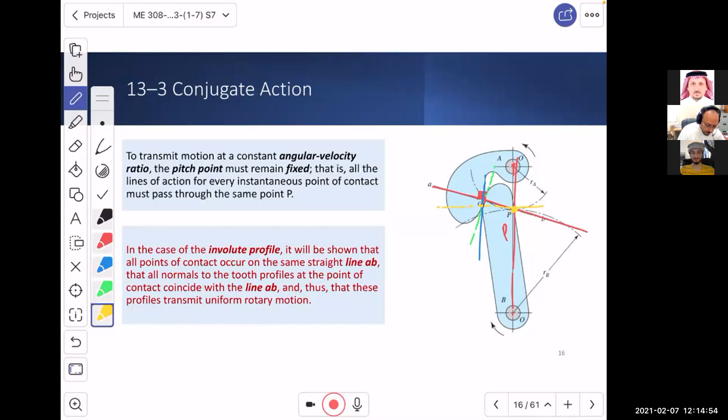Now what happens if this is not constant? Because the point of contact is changing. Remember, velocity equals omega r, which means omega equals V/r. So if that r, from which the rotation is measured, is changing with time, then you may have a fluctuating motion, something like 1000, then 980, then 1000, 980, 1000. How can you maintain the same flow, the same pressure, the same... how?

The process is all ruined. You need a smooth, constant motion. 1000, always 1000.

The involute profile is even more interesting. It's one of the ways to produce that constant motion, that constant angular velocity. But it is more, I'm gonna put it between two parentheses, more magical.

And I'm not joking, it is way more unbelievable. We do not promise only to let the point of this line, which is the perpendicular line of contact, pass through point P. No, we actually promise that as the motion is set, the contact point changes, but the line of action, this line, is gonna be always constant. Now remember, this line changes here because the tangent changes and the perpendicular changes. However, as they change, they all pass through point P.

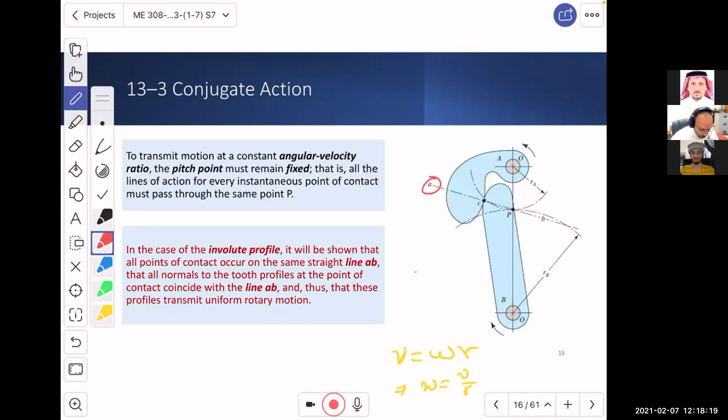Now what I want to show you over here is this. I want to show you that we can actually do this. It is not something like magic, but to show you this, let me tell you how it is done. Imagine that we put a flange, like here, a flange, which is B, like that, on top of this circle, cylinder, cylinder A. Don't think about how big it is, what is its radius, just leave it aside.

Now imagine that in this cylinder, we fixed the rope here, and then we wrapped it around it. And now imagine that you are pulling that rope from the top right here. Now, if somebody, or if you fix the rope over here, you can't pull it, right? It will always resist you, which means the rope will stay in tension.

Now, while you are pulling the rope, you can raise your hand up, you can lower it down. So for example, if you decide to push your hand down, the rope will wrap around, but it will go like that, right? If you decide to take the rope up, it will go like this. Regardless of how you change the altitude of your hand, the rope is indeed always tangent to the circle, always, will stay always tangent to it at the point before it's split from the curvature.

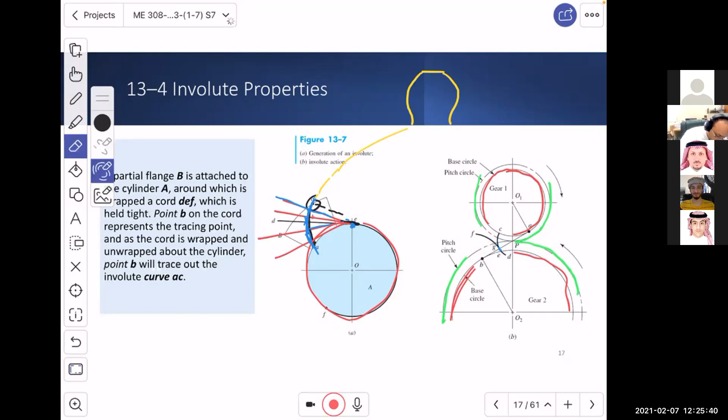Now what is important right here - these are some fundamentals you need to understand. First, this circle used to generate the involute will have a point A and another point B for the two mating gears. At this point of contact, this line is the pressure line.

That's the line which makes the pressure angle. That's number one. Number two, the pressure line will pass through point P. Do you remember point P? It was here in this example - these are not gears, but here it is the point which connects the two centers. That's condition number one.

Number two, that point passes through the location where the two gears are touching, which is at the pitch circle. And this line, by the way, is tangent to the radius of the involute circle. The involute circle - what do we call it? We call it the base circle. Base circle is the circle we use to generate the involute profile.

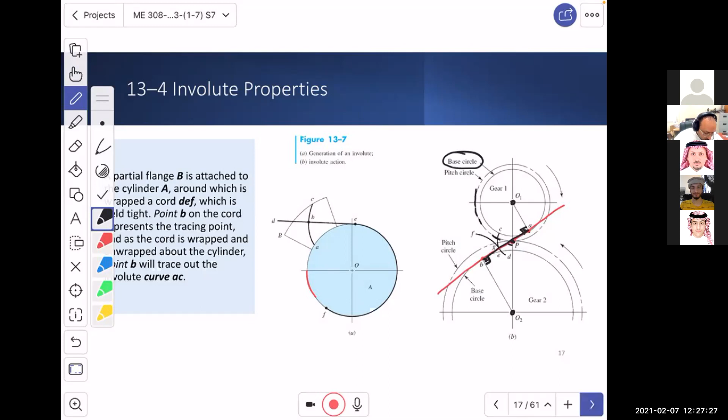Now if you look over here, we have a lot of dependencies. What I want to show you is that the circle we use to generate the profile is called the involute or the base circle. So what I'm going to do is show you something very interesting.

Let me share my computer screen for a second. Let me do this. Now what is this? This is an animation of an involute profile gear.

And what I want to tell you is the following: do you see this line? This is the radius of the base circle for this gear, perpendicular to it. And this line is the radius of the base circle for the other gear.

And we said that the action line - do you remember? This point is A, and this point is B. Look at it. This is point A, and this one is point B. These lines are the ones I just made over here.

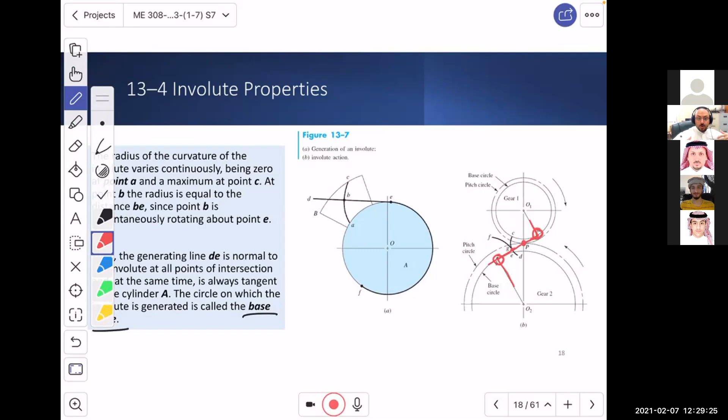Now what do we know? We know that this line touches over there at point P. This is the pitch point, right? Where the pitch circle comes in contact - the pitch circles of the two gears come in contact. And what do we say here? We said that if we follow an involute profile, then this is the promise we deliver. This is the involute profile.

The two gears came in contact. When they came in contact, that's the point P, okay? And the line of action over there, which is sometimes called the pressure line, because this, if you draw a horizontal line, is going to be phi, the pressure angle.

So what did we say? We said that this is the line where the forces are applied, this one and this one. So one gear is pushing this side, the other gear is pushing that side. Do you understand? Now I want you to focus very, very carefully.

We said that if you follow an involute profile, as the gear moves, the point of contact moves. Look, it gets further, but be careful, the gear is going down, because it is moving. So here, look at the level. This is the level, then the gear went down, then the gear went down further. Why? Because of the rotation. We're rotating. Now, the point...

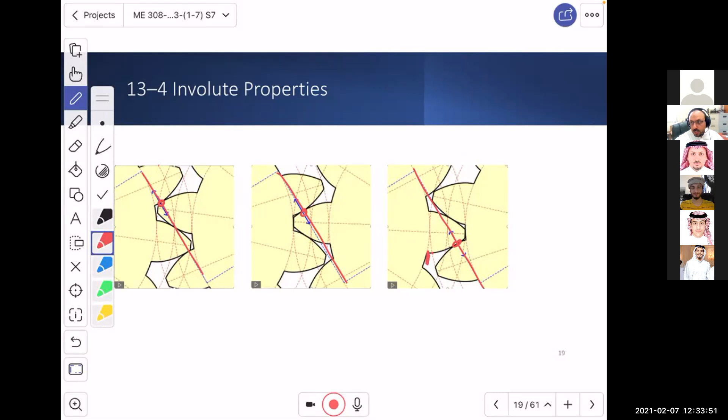So let me show you what I wanted to show you, okay, without further delay. So what you see right here is an animation. I need to switch it on, and I'm gonna let it go for several times. Now look, follow my mouse cursor. Over there, the gear, they got in touch, they move, the point of contact moves, but the line of action is always the blue one.

This is amazing, ya shabab. This is going to secure a smooth motion. That's why you don't feel it, you don't feel that tick, tick, tick, tick. It's not like a step motion, right? It's so smooth. And the forces are always acting in the same line, no matter what. That's what makes it uniform, that's what makes it constant in ratio. Otherwise, you may have a wavy or shaky motion.

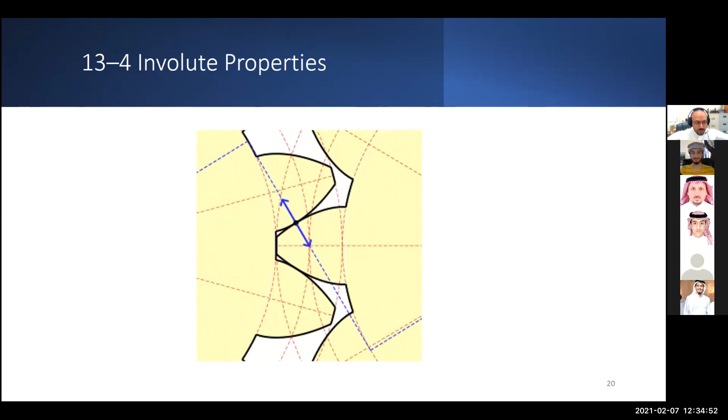Do you see that? Now, to answer the other question, let me show you this example. Now, look, this is the line of action. Now, all of a sudden, here, the green circle indicates that there is an engagement. Look at the point of contact, it is moving, but with respect to the gear, it is always acting along the line of action.

Now, while I was talking, look at this gear over there. There is another one, A, here, got engaged. Now, what does this mean?

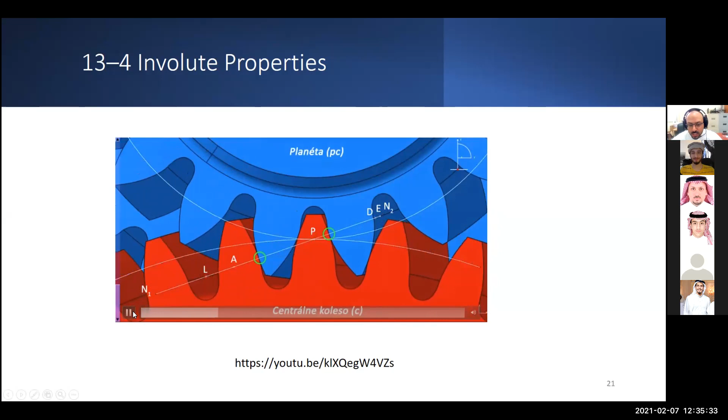It means that, look, this gear is gonna finish a journey up to here, right, while the other will finish a journey from here all the way to there. So this is like, if you imagine that the contact for one gear is 1, then this is 1 point something, because this has only a little bit left of it, while the other has a full contact to go. Did you understand? So I'm gonna turn it on.

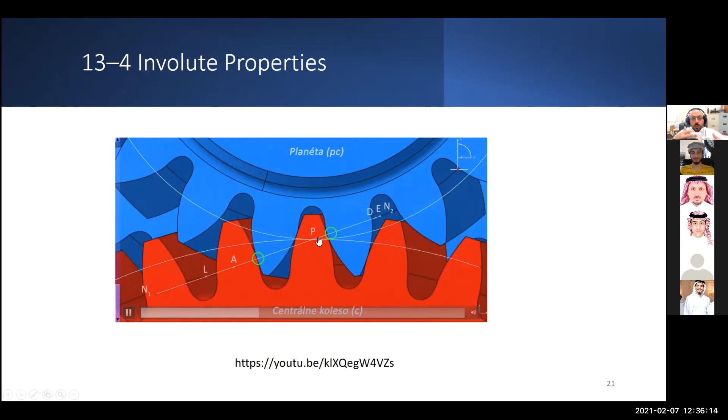So look, this is now about to finish, and another one will come. Look, there, another one comes, and this one. So it is continuous, right? Always there. The fact that it is acting on the same line makes the reason why the velocity, angular velocity ratio is the same, which is fantastic. And you don't have this jerkiness or shaky motion because something is happening here one time, then another one happening there—no, always on the same line. This is really, really nice.

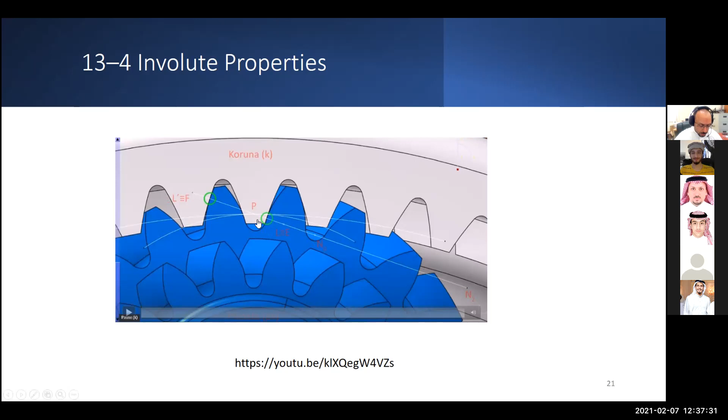So gears have a lot in them, ya shabab. It's not just cut teeth and that's it. I think now you understand how much mathematics and effort you put to generate this curvature, because this curvature and that curvature will change their radii, change their tangent at the contact in a way that will always preserve the perpendicular line of action to that tangent, pointing exactly at the same line. This is very beautiful. I love geometry a lot, and I think this is really, really nice, but it's all up to you—do you like it or not?

Let me share my screen now and go back to the slide.

Of course, ya shabab, these are fundamentals, which means later we will never talk about them again. Now you understood the involute, you understood why the motion is the same, and so on.

There are many examples on YouTube and the internet on how to generate an involute. But in general, for a gear, you can imagine that what we are going to do is split the gear into equal distances, equal arcs if you want to call them. Then we take a curvature, a line, and we extend it right there, just like what we did.

So you have the rope, and what do you do basically? If you extend the rope at a different tangent, let's say: you take the rope, and when you reach this point, you say I am not going to continue down, I am going to continue straight. Then you go to the next line and say, when I reach this point, I'm going to go straight. Then you have another one and say, when I reach this distance, I am going to go there. So for this one, this is the point. For this one, this is the point. For the green one, this is the point. And finally for the red one, you say, when I reach this point, I am going to go straight.

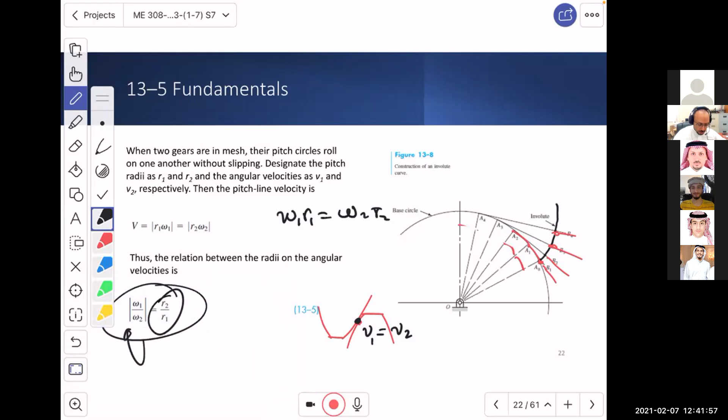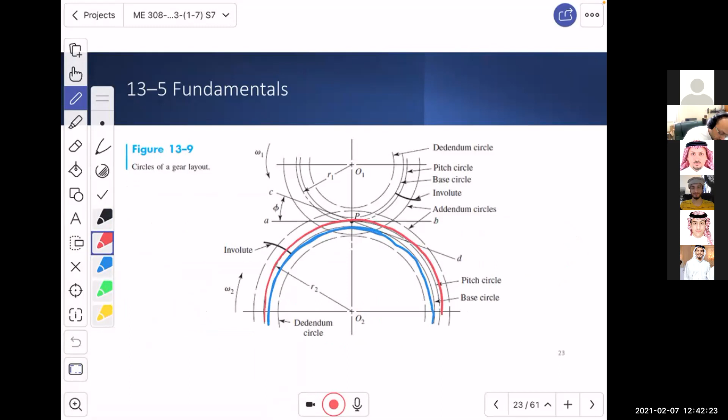So basically now what we know is that the base circle is down under—this is the circle called the base circle, and above it we have the pitch circle. So the question, and as I told you, this is the contact point here, the pitch point, and we have the pressure angles.

So the question is, let me just get rid of the second gear and keep one gear only. By constructing the point over there, this is point P, the pitch point. And I know that this is the line of tangent for the other gear. So the other gear is right there, but I'm not drawing it here.

By knowing that this is the pitch circle right there, the base circle is somewhere down. Do you remember point A and B on the base circles? So looking only at one circle down, which is for one gear, the base circle, let's say this is point A, and this is point B.

Now, we all know that the distance from P to the center is half the pitch diameter. We always represent a gear by a diameter, which is the pitch diameter. So it's actually D, the pitch diameter, and half of that is its radius, the pitch radius. So this is R, from here all the way to there.

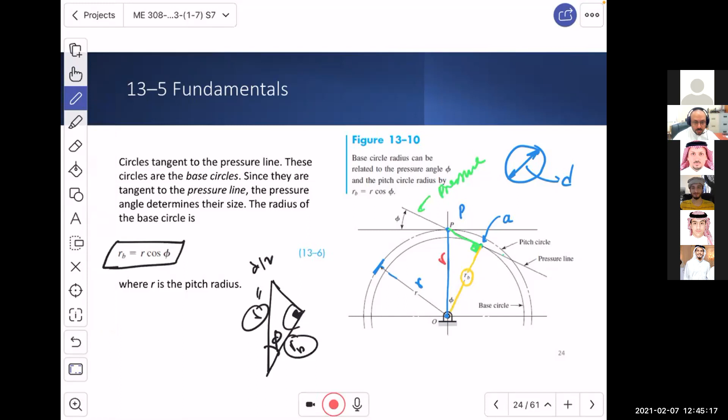So also, you may want to memorize these or write them down in your notebook. Along the line, we will have several standard relations. Among these relations is the distances for the addendum and dedendum. As a standard ratio, their distances are 1 over P for the addendum and 1.25 over P for the dedendum. These relations are good to take note of, because in the future, especially in design, if you have any case with unknowns, these values become very handy.

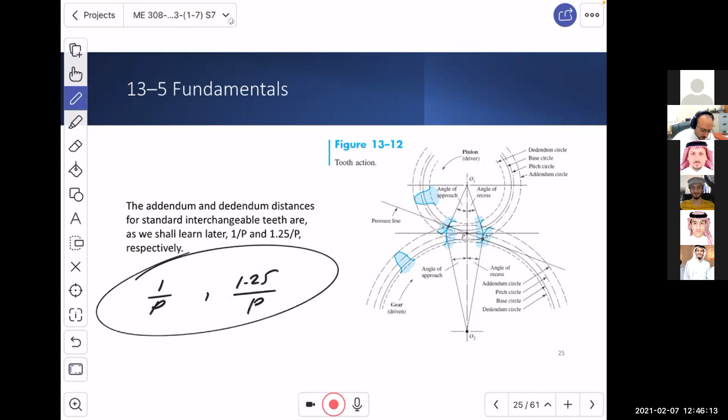Now, the last thing I want to talk about, then I will stop. We talked about two circular gears. Now we know in the industry that there are racks. Racks are like this—a straight kind of toothed part which is engaged with a circular gear.

In that case, we imagine that the rack is a gear with an infinite pitch diameter, infinitely large. And here, if you say this is the base pitch for the rack, it is related to the base, so the base pitch, PB, is equal to the circular pitch multiplied by cosine phi.

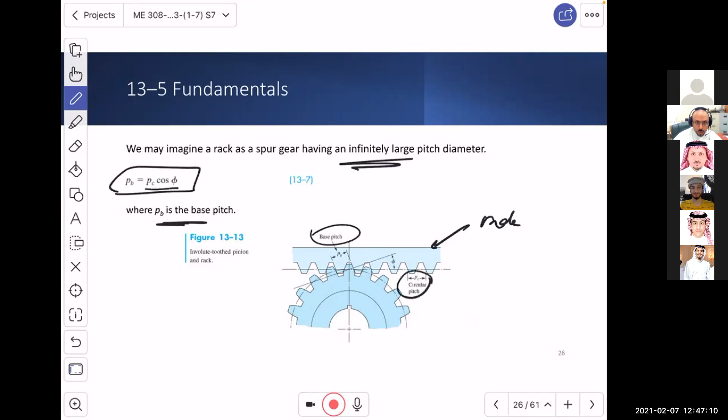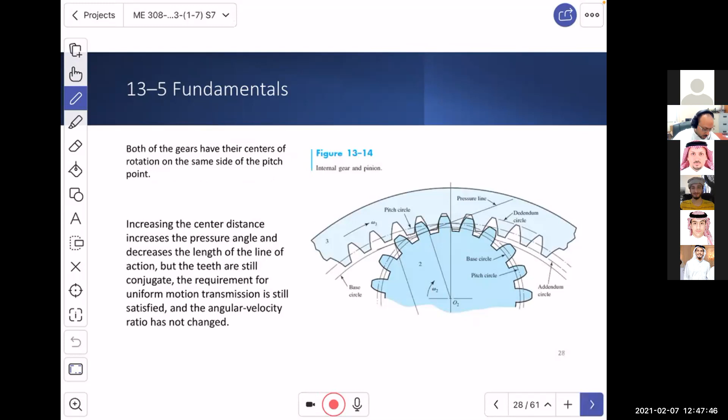And lastly, what happens if we have a big circular gear and inside it there is a small gear? This is also possible. What you should know is that all of these, especially this one, can still satisfy the involute profile, and the constant angular velocity can also still be secured. There is an example I'm not going to go over—it's very simple, you can go over it.

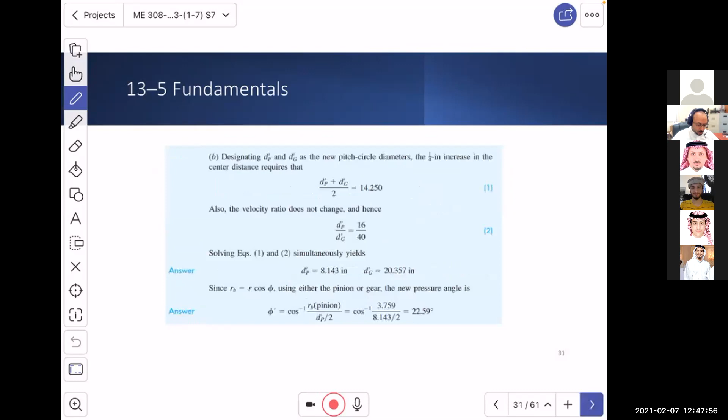Next class, we are going to talk about the contact ratio, which we just touched on—the fact that gears have part of them in contact and then another pair is also in contact. Okay, I need to stop here, and I'm going to take your attendance right now.